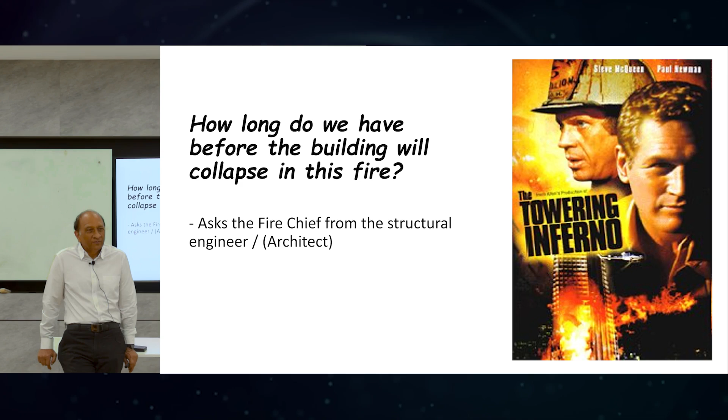I can assure you that even with all our simulation, all our software, all our modeling, we cannot answer that question, how long the building will survive before it fails. But people expect that kind of answer from us. Exactly the same thing - people expect engineers to be able to tell them about safety in their view, not in our view of the code, factor of safety and all that stuff.

So this is a reminder that even a long time ago, they expected engineers to answer that, which we still cannot answer. In fact, that prompted me to do some research trying to figure out how long a column will last in a fire.

We did some finite element modeling of heat transfer from the outside through the concrete to the rebar, then did fiber modeling and nonlinear analysis of the section over time and temperature, trying to see when the rebars will yield and when the concrete will crush, including temperature effects. And just for one column section it was very hard, let alone the whole building. So we are still very far from really simulating the damage in that way.

So now, we have seen this before - you've seen many of these slides showing that a lot of progress has been made, but still the progress is not as people expect from other products. For example, you buy something, it doesn't work, you return it, you get your money back. The structure doesn't work, you cannot get your money back. We don't have that kind of warranty yet because we just don't do enough yet - it's not a product yet, right? So we are still very far from what people expect from other things.

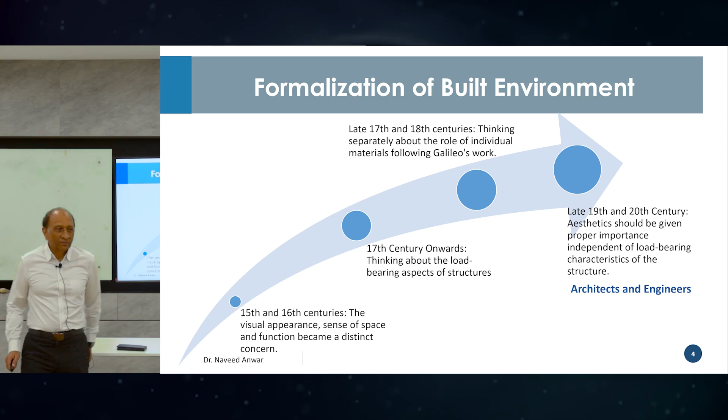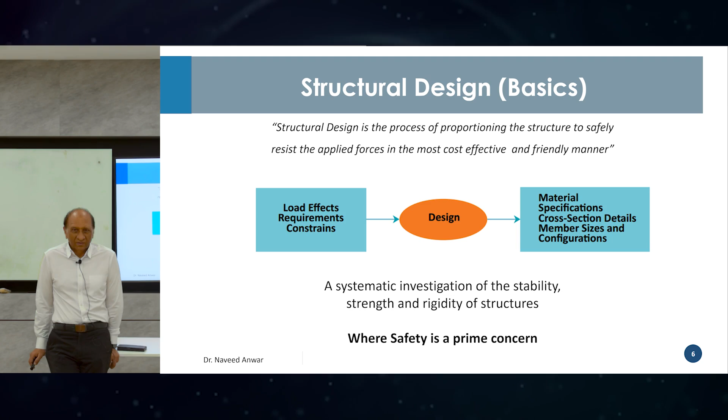Let's just move forward. We are mostly concerned about that - safety is our prime concern. That's where we draw our line, that our job is that, and once we do that, we think the rest is somebody else's problem. But that is not how the public sees it, and that's not how society's damage is happening. Cities come to a halt not because structures fall down, but because of damage or a perception of damage, a perception of unsafety. So that's what we are talking about today.

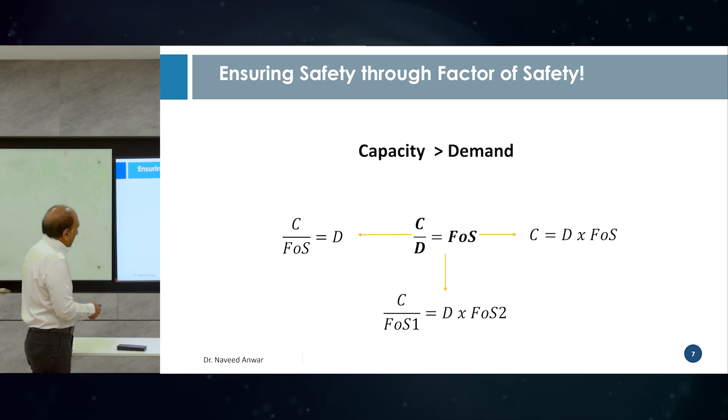So factor of safety, as I mentioned, we have all these formulas to deal with that. But once again, it's all about safety and factor of safety, and factor of safety is such an unreliable way to look at things, because the way it is calculated, the way it is assigned, it doesn't give us any real knowledge. It hides everything in that factor. All the things that we should know but don't, we call it factor of safety - which is the factor of ignorance, you may call it.

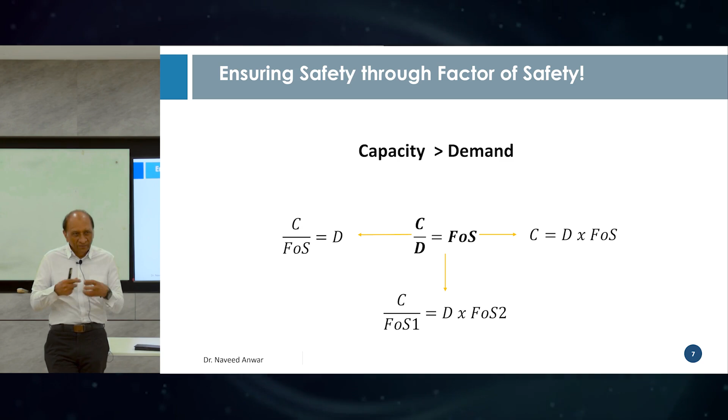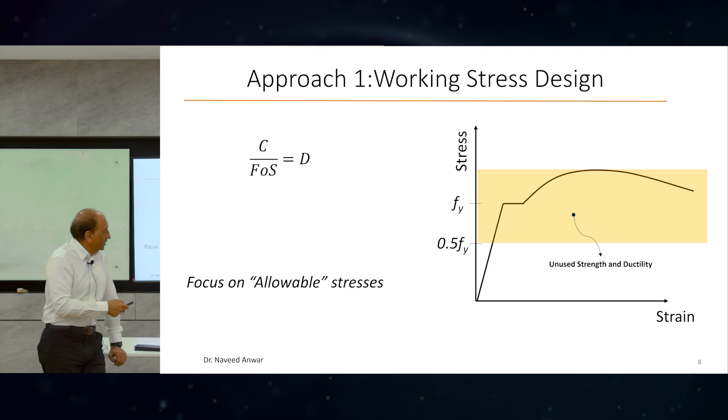So if we want to remove all of that, we really need to understand things in depth. That is the area that we don't know - we put it in the factor of safety, from 0.5 FY to yielding and beyond. We just don't know what is happening to the structure and what is happening to the things attached to the structure - we just draw the factor of safety. This is the working stress method where we started, and then we go a little bit up to FY, but we still don't know.

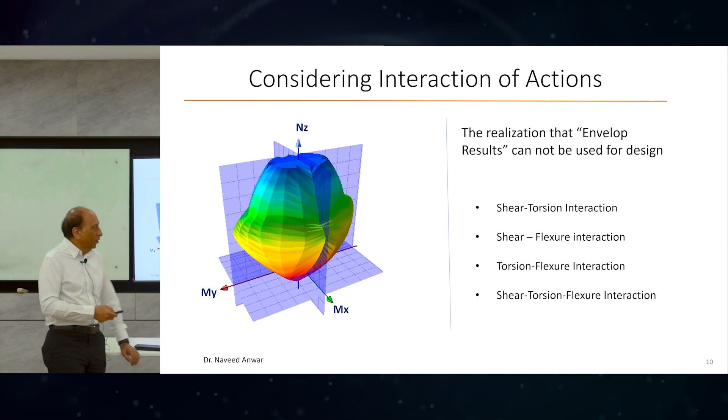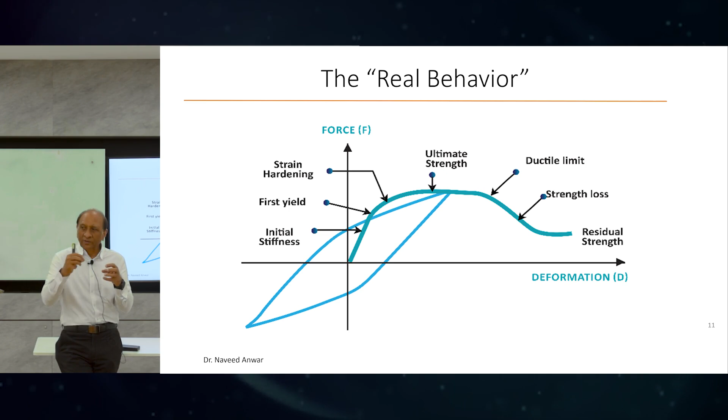So residual strength for structural elements and non-structural elements is different. The problem is that for non-structural elements, the residual strength is very little because it's brittle. And so as soon as they reach that point, they're just gone and their connections are gone. The problem is that we don't design them to absorb the movements, acceleration, and velocity. There are three components: drift, displacement or velocity, and acceleration. And things get damaged differently from these three things. Some things get damaged by drift, some by velocity, some by acceleration. So we have to separate the non-structural component damage into these three categories.

So seismic design approaches, we have already talked a lot about, I'm just summarizing. So for the earthquake, we need to talk about the drift, we need to talk about the acceleration and ductility, levels of damage, life safety, collapse prevention, energy, damping, and many things. And at this point, what is less important is stress, strain, strength, stiffness, and factor of safety.

Those become almost irrelevant in this discussion because, as I mentioned in my other class also, earthquake is bringing the level down, not up. Wind's service level is here, we multiply it to bring it to the design level. Earthquake is already very far above, we are dividing it to bring it down to the design level. And that division has so many issues. That's why we cannot assess these things accurately, and we need to expect that the real force may be much higher than the design. That's why all this damage can actually happen.

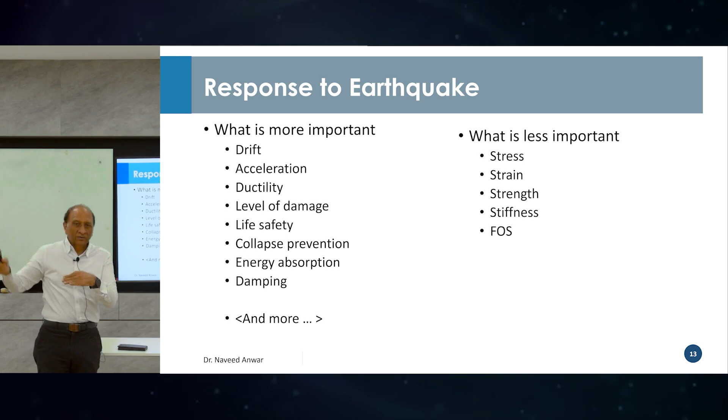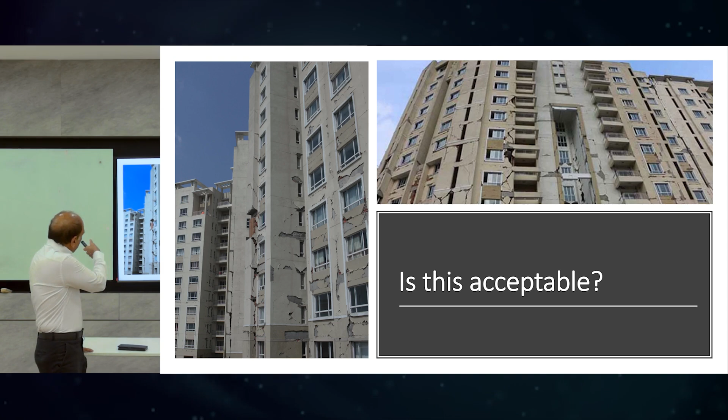So this is the image from Nepal. I went there, and this presentation was made after that earthquake. This is a very interesting case study because there were three buildings there, three towers of different height. And when you go to the site, you can see there's a lot of damage very clearly. This building was designed very well by good consultants in India, following the codes, but look what happened. It's non-structural damage, the structure is still safe, but do you think anybody will live there? You will not live there, right?

So even if we do PBD, we will still get this. That's the sad part, that even if we had done performance-based design for that building, we would have still gotten many of those cracks. So even if we do nonlinear analysis, because we are expecting the walls to break, you model the walls in the nonlinear models. In fact, they did not model the walls, but now we recommend everyone to model the walls using strut models. But the strut is designed to break, which means we are expecting the walls will break. So it's a perfect structural model with the damage, but it is completely unacceptable to anybody. People spend a lot of money, earn from abroad, bring it back, buy something, and then the building is gone. So this is a major problem: this kind of damage, which is acceptable by us as a design process and acceptable by the codes, and even acceptable by the PBD, is not acceptable by the public.

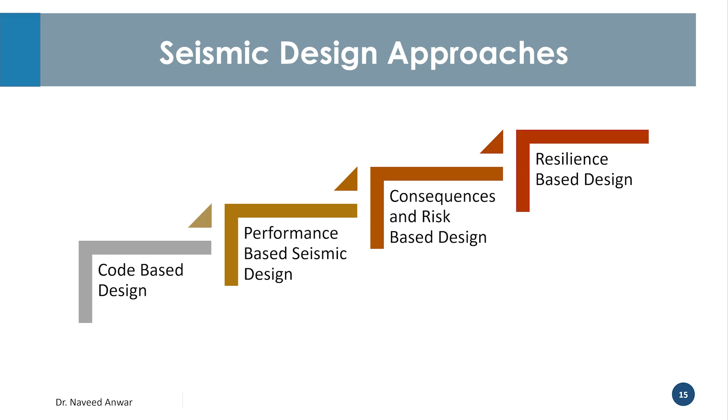So this is what we are talking about today. And that is what we talked about, all the steps, all the way to resilience. So now we are talking about consequence and resilience beyond PBD. Code-based design we have talked about already, I can skip this because it's a repetition.

It's mostly code-based design, basically we want structural safety, but that's never really checked. Of course serviceability is checked, but that's for a much smaller earthquake. As soon as it goes beyond that, we expect the damage to come, but people do not expect the damage to come. That is the key.

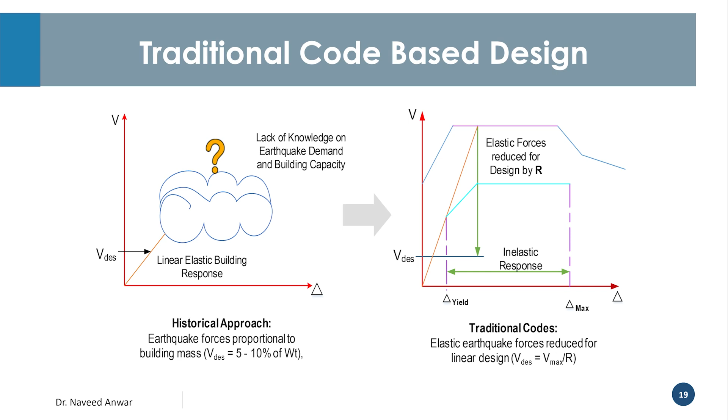So this is the historical approach, that we put a cloud in this area above that. After linear, we have kind of an unknown zone. We just don't know what is going to happen, and we keep it that way until PBD came and we start to explore a little bit more. But still, a lot of things are in the cloud. We still didn't check a lot of things that I mentioned to you.

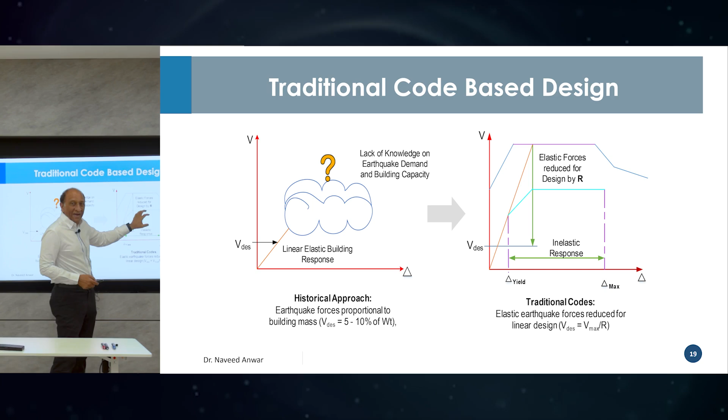And then because we have the elastic response reduced by R, which is wrong, and so many other things, codes try to remove that cloud by putting this one in, but then add more cloud, because R itself is not reliable. So now you can see that there are so many codes.

And this brings us to another question, which is a very simple question: which code is right? Just the fact that three codes differ proves that none of them can be right. Because the structure is the same, the earthquake is the same. Why do two codes tell us one is saying it's safe, one is saying it's not safe, one is passing, one is not passing? This means it's quite arbitrary. All the codes are rather arbitrary.

And that's why we did one thesis a few years ago. We said, okay, design the same building with nonlinear analysis, first design them to 3 different codes, and then do nonlinear evaluation to see which code predicted the best, was closest to the PBD, or gave the best performance. So we checked ACI, we checked BS, and we checked Eurocodes.

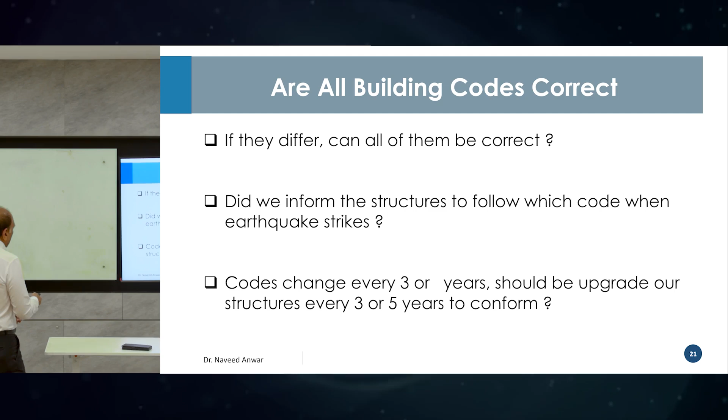So that's the other issue here: if they differ, can all of them be correct? Logic says no. If there's only one truth, and they're all giving different results, then chances are that none of them are right.

The other thing is, did we inform the structure to follow a certain code? You design based on a code, did you say, 'I'm designing you to ACI, please follow the ACI when the earthquake comes'? Of course not. It's going to perform the way it likes to perform. It has to perform. That's why PBD is not code-based, because we want to see the real earthquake, the real structure, and let them decide.

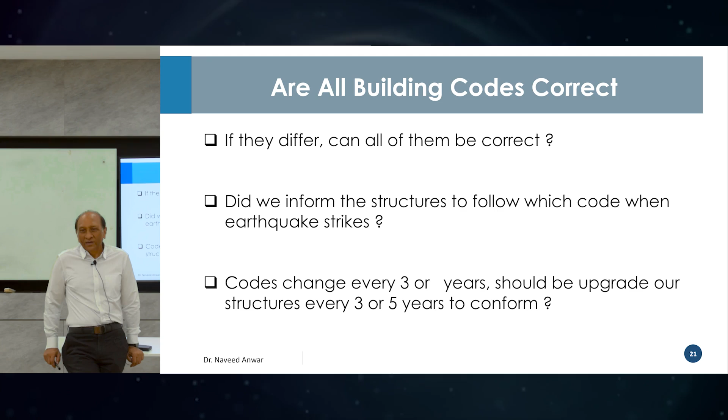And another thing, the code changes every 3-5 years. Formulas change, limits change. Should we go back and fix every building? We cannot, right? So a building which is passing today, in the next version the same building is not passing. What is that? But of course, that's how progress is made. The point being that we should not take these things extremely seriously, and should recognize that they have limits.

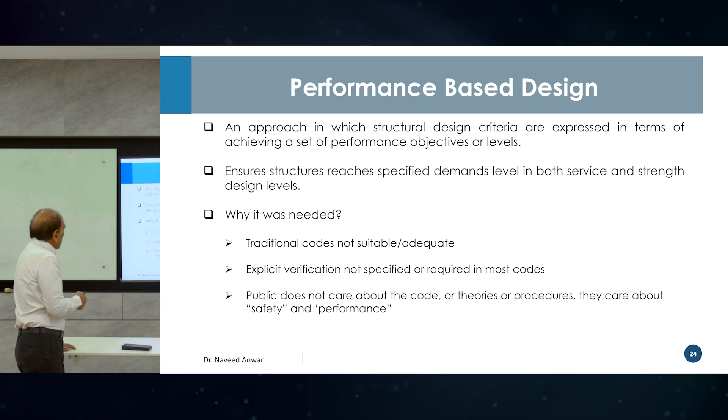Okay, so this is all we've talked about. Let me just move on to the topic today, because PBD we've covered quite a bit.

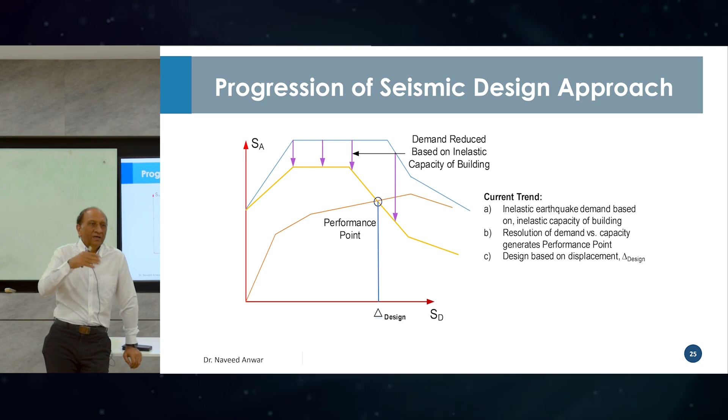Low earthquake, high earthquake, very high earthquake, some earthquake beyond that. So we can find out multiple performance points for different levels of earthquake, and then see how the structure's response will be.

That brings us to this one: operational, immediate occupancy, life safety, collapse. So we can say, okay, for this earthquake we want the structure to be like that, for that earthquake we want it to be like that, for this building, for this earthquake here. So we can decide two things: same building at multiple different earthquakes, and different buildings for the same earthquake.

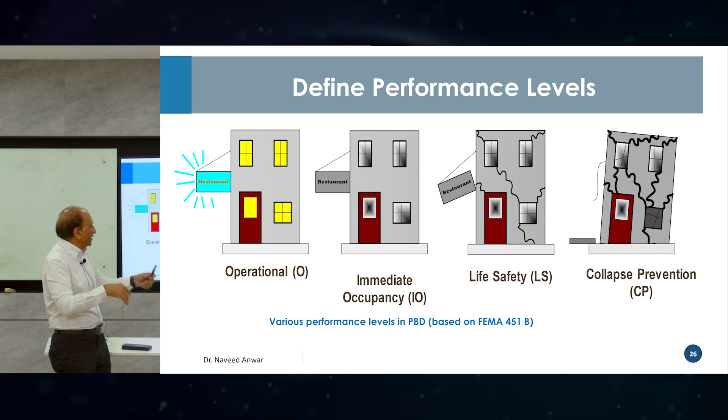For example, a hospital - we will say, okay, even though the earthquake is very strong, I want the hospital to be operational. This is storage, there's nothing important there, okay fine, we just prevent collapse. So for the same earthquake, different buildings can have different performance expectations, and the same building can have different performance expectations for different earthquakes. This gives us complete freedom to evaluate everything.

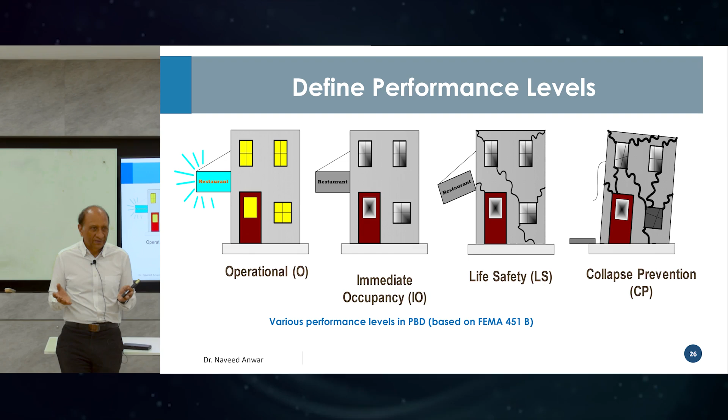That's what PBD is, what we have been talking about. And we can put it on that curve, as you can see from here, so we can link everything together.

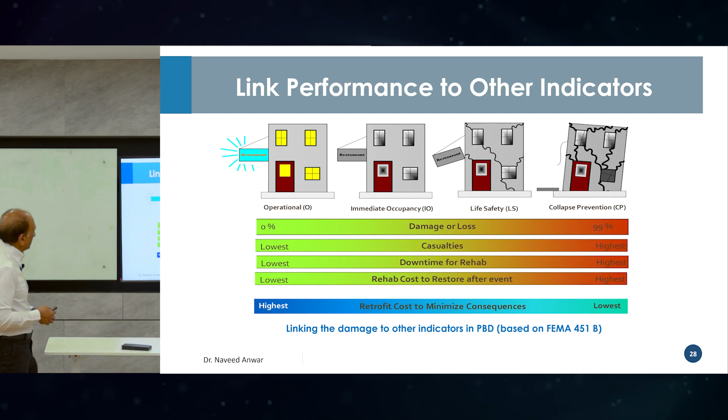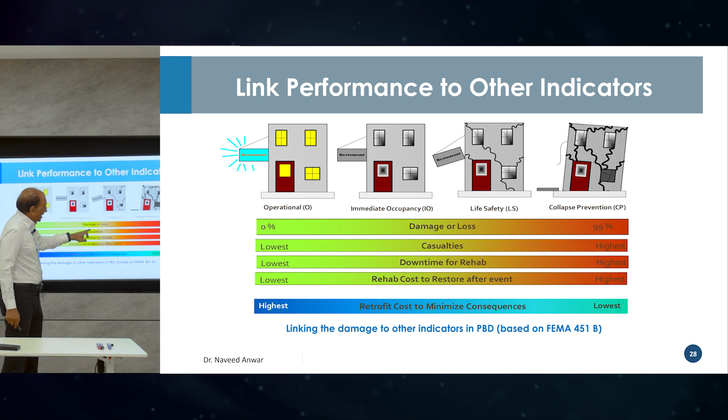Next, this is the main slide. Because once we have that, we can connect not only damage, but also casualties, human loss of life, serious danger, and downtime for rehabilitation - very, very important, how long you have to shut down the building to repair it. For a hotel or restaurant, they lose business for 1 day, 1 month - that loss is huge. For a critical operation, it's much, much bigger than the cost of the building, and the cost to get it back.

And then retrofit cost to minimize consequences. So everything we can put now on one sheet.

Once we have done the performance evaluation, we go beyond - we don't stop at just performance. We go to these 5, 6 different new lines also and start to evaluate them, and then we get the total resilience of the structure. That means the client or authorities can decide that, okay, we don't want it to remain shut down for more than 1 month.

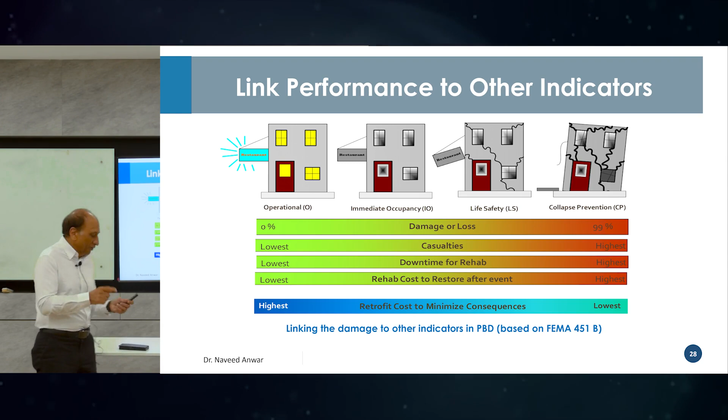But do we have the tools to do that? Do we have that? And luckily we have. We can actually go to the level and say, okay, you want this to be repaired within 1 month? We can do that. But the problem is not about that - I will tell you what the real problem comes later.

So performance-based design - we talked about that we need to involve all these people now to make sure that everybody works together. So we need to involve the architect, first of all, because non-structural damage will be linked to them, and then structural engineers, the performance-based design people, the site-specific consultants, and the PBD reviewers. Everyone has to agree that this is what we are going to do.

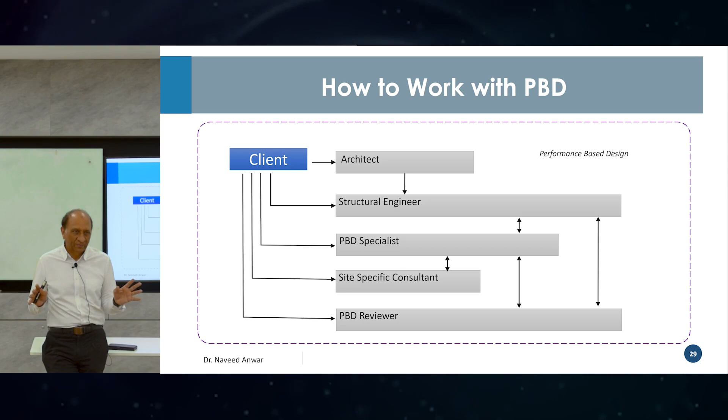Because this is not the code. So client, architect, the designer, structural designer, the PBD reviewer, and the PBD consultant - everyone has to agree this is the performance of the building that we want. This is non-structural, structural damage, everything that we want, it should be like that. So that has to be agreed, because everything next will depend on what is agreed.

Okay, first is number 1: everyone has to agree that we are going to go beyond the codes. Now you can ask, do the codes allow that? And the answer is yes. Codes actually say that if you can prove that what you're saying is better than code, you can go ahead, and if somebody can certify that. So by definition, procedures like this are allowed by the code, but you have to qualify to get that.

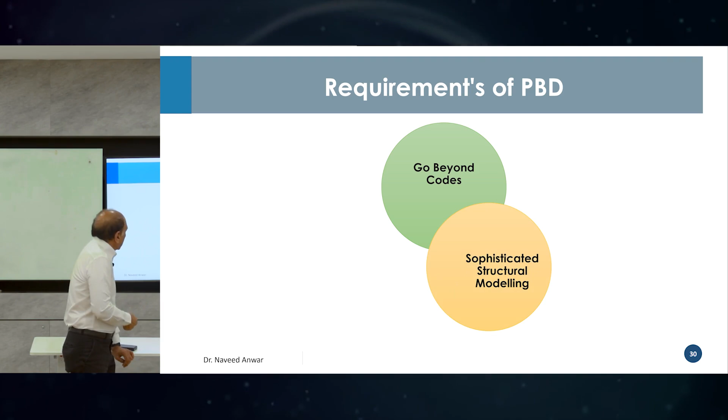So that's number 1. Then we need to have sophisticated structural modeling - that's what we are talking about, a lot more than what we did for the class project. Some groups are trying to do that, fine, but we need to learn, and we have a few webinars. You have seen Dr. Pramin present a lot of the details for the nonlinear modeling. So we need to have that ability.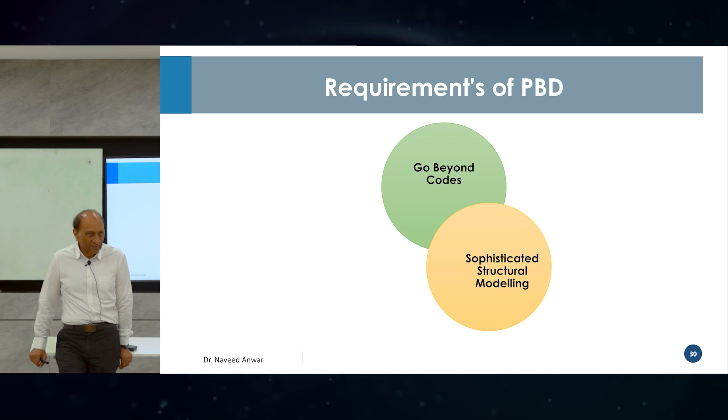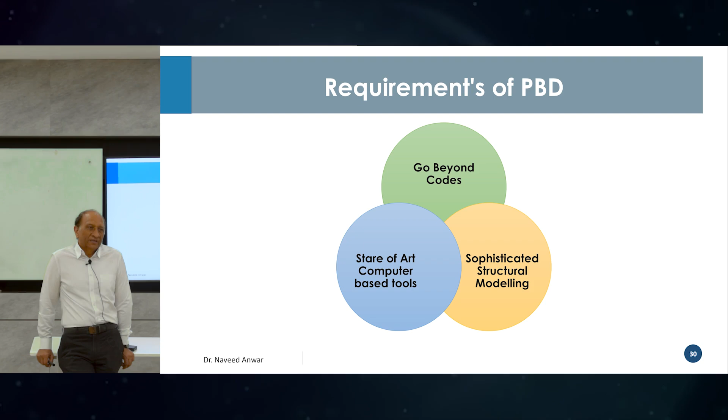So you need to have software, you need to have the ability to model that, and you have to have people who agree to do this: linear, nonlinear, result, and interpretation.

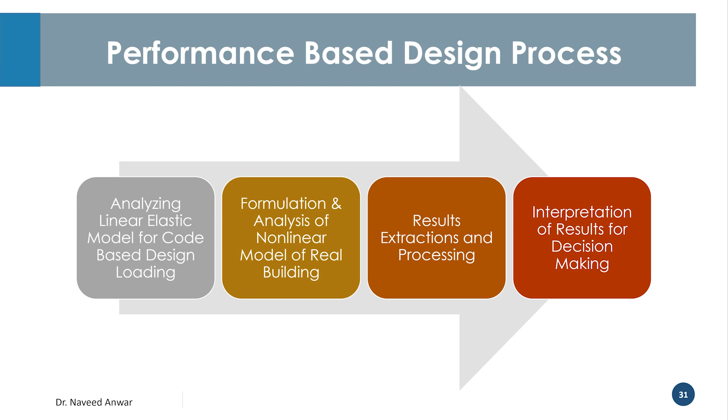That is still possible, it's a step up. The biggest challenge is that you need to incorporate the actual reinforcement from the building drawings. So it's no longer that you just put in the section, you have to put all the reinforcement in the model, and that takes a lot of effort to get that information. So design has to be complete, detailing has to be complete, then you bring it back to the model. It's just a lot of work, not so difficult.

The next one becomes more difficult: extraction of the results from the nonlinear analysis, because this can produce up to 1 terabyte, 2 terabytes of results - terabytes, not gigabytes, I'm talking about terabytes of data. So if you have that much data, just opening it, getting the results back, compiling it, processing it, it's a huge task. And once again, even if you can do that, then finally understanding it - that's where most of the difficulty lies, not in the first two parts.

That's what takes time, years of practice, to do the third and fourth parts. Sometimes now it's getting better, but sometimes you have to wait days and days just to get the results - extracting the results, not running the analysis. That can take so much time because you have 11 ground motions.

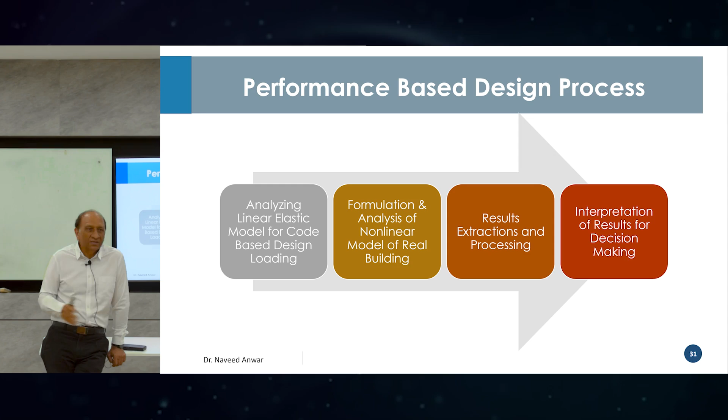Every time step in one ground motion runs for, let's say, 50 seconds, 1,000 time steps. So you have 1,000 results from 11 ground motions - 11,000 results for every column, every beam, and then all the load combinations. So the results are just unbelievably huge. And then getting them, understanding them, averaging them, plotting them - it takes a lot of time, effort, and understanding.

So from that we move on - I've talked about the questions from PBD. Once we have done the PBD, as I told you, you can get a good idea of how the building will respond. But it doesn't tell you what is the risk and what are the consequences - we are just doing a process, we say okay, I'm here. But the question is, what is the risk of things not going as we predicted?

Because this is not absolute certainty. It's still a gray area in many ways, because you did a model, the actual material - so many things that are still not absolutely certain. So there is still an element of risk there, uncertainty there.

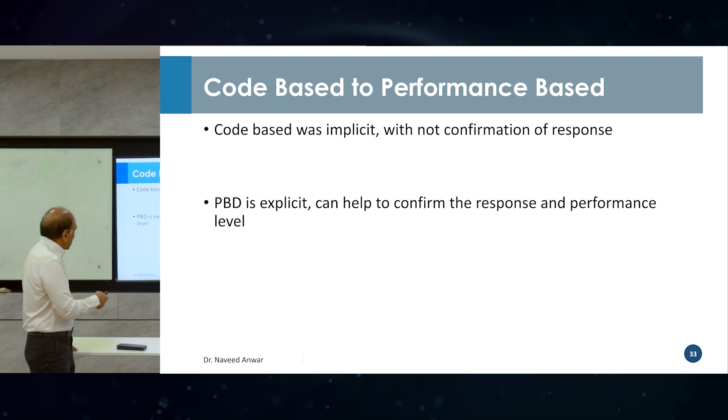So what if the performance level is not achieved in reality? That is the question - okay, we have estimated everything, but what if that is not actually achieved in the real building, because of modeling inaccuracies, because we could not model the foundation properly, maybe the material strength is more or less, or some member, some extra mass was put there, some walls were added - because we can't know the structure fully until it is there.

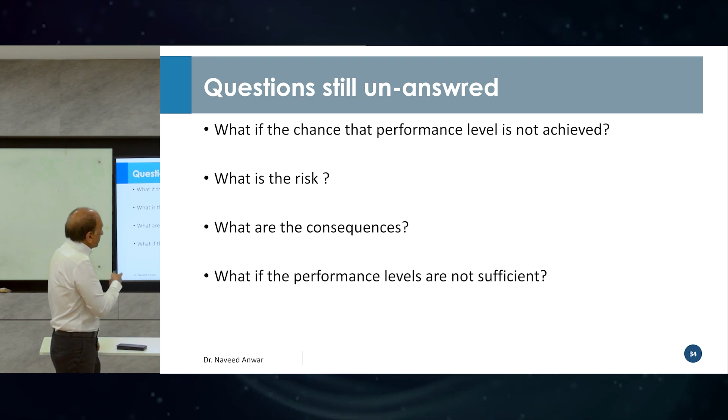So there's still a risk that this performance objective will not be met. And the risk you have seen in that building I showed you earlier, the cracking - that's the risk people have to take. Then what are the consequences of that cracking? It will affect people's lives, it will hurt somebody, it will cause people to lose their life savings in their apartments or whatever.

So the consequence of that risk is very different from PBD. PBD doesn't go into that direction, doesn't care what happens after that. Okay, and then what if the performance levels are not sufficient?

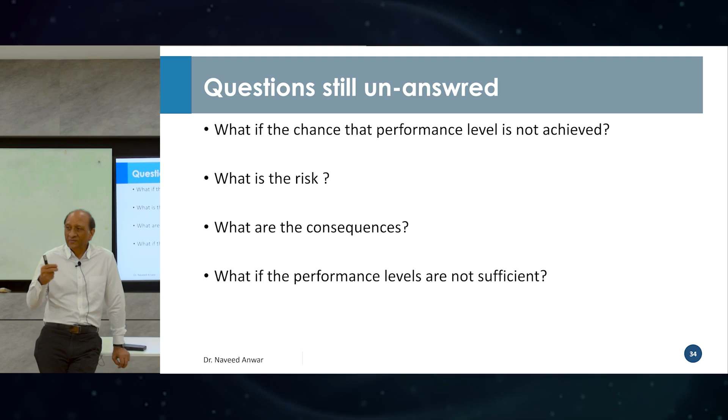Like I said, the baby hospital needs something more because they installed special equipment that cannot sustain even that much vibration, like MRI machines. Or now all these data centers, extremely sensitive, right? So we don't even know what kind of performance levels we need for them.

So these are the few questions. And like I said earlier, is this acceptable? Obviously you will say not, but the codes say yes, this is what you were designed for. Try explaining that to the tenants, that I designed your building for the code and you have to accept it. And that is our challenge.

We are very lucky in Bangkok that the damage is there, but people are still understanding. And this overall, I went to the city, I talked to many people. There was a big event we had, and people start to know, okay, there are people called structural engineers, and there are people who did some good jobs so the whole city survived because everybody felt the shaking.

99.9999% of buildings survived very well. So which means people believe that, okay, there's some engineering behind it which saved them, because they saw one building collapsing. So it is a reminder that things can be that bad, but it wasn't that bad in your building. So you should be kind of thanking the engineers. So we are in a good shape right now, at the moment, okay, in the public opinion. So we should be glad.

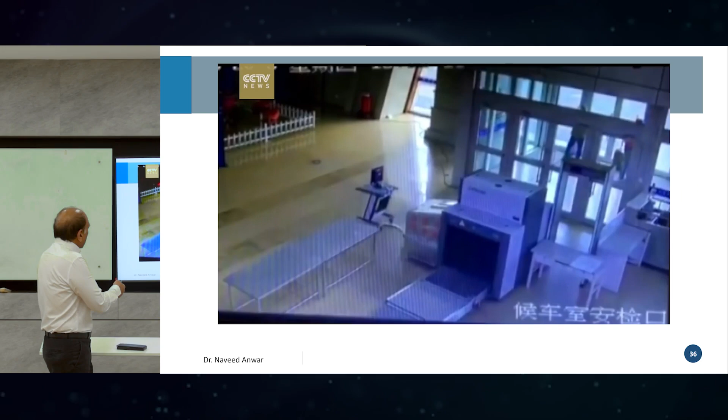But this is not good, as you can see from here. In the public's eye, this is not good. And that is where, so even if we do the PBD and everything, we still get that. So now we have actually experienced it, so it makes it more real. You people haven't - people in tall buildings in Bangkok, you should ask them what happened to them.

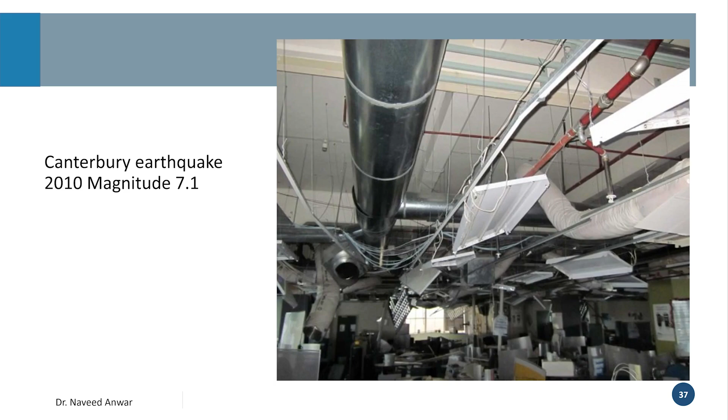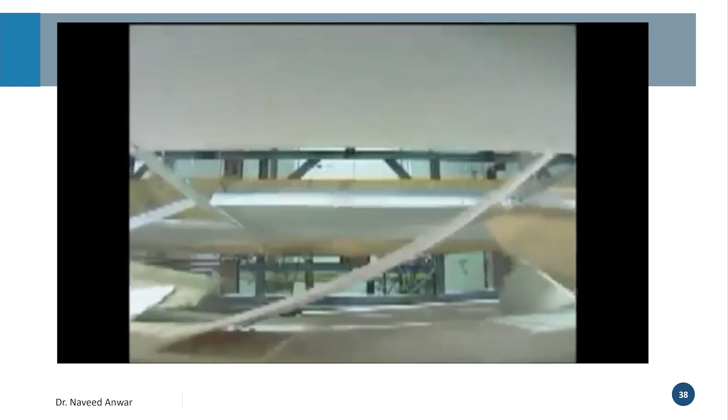So this happens in so many buildings. The ceilings fall down, the partitions crack, which means the public and society still doesn't really accept our things yet, right?

It's just like the development of automobiles. If you look at the movies from early on, even in the US, nobody's wearing seat belts. There's no top, people fly, because safety wasn't - it was acceptable to get hurt. People expected to get hurt in a car accident. Now, people do not expect to get hurt. They expect the airbags everywhere, they want the sensors, and they expect, and that is happening.

Even in major accidents, people survive without any injury, most of the time. I don't know if you know that story about the Tesla car and somebody tried to drive it off a cliff. Do you know about that? Okay, so in the US, there was one family, and the person was driving. He decided to commit suicide by driving the car off the cliff with his family, for whatever reasons.

So when they tried to turn, the car wouldn't let him turn because it sensed something was wrong. Anyway, he forced the car, but because the car already knew it's going to happen, it engaged all of the safety features - the airbags, the seat belts, and everything. So even though the car went down and hit, people were saved.

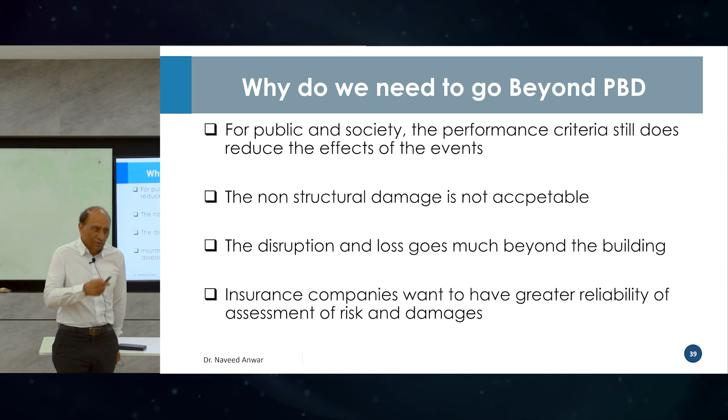But my point is the insurance companies were not happy. And this earthquake, insurance companies are obviously not happy. So they really want this research to be done so they can protect their value and insure the buildings properly. The people behind the non-structural damage assessment funding are insurance companies. It is in their interest to do this, right? So if you want funding at this point, go talk to insurance companies for your research.

So, consequence-based: it's not enough to say that cracking and non-structural damage is acceptable as long as the structure does not collapse. This is our statement right now as engineers. It is not acceptable by the public, by the insurance companies, by other people anymore. Just to say my structure is safe, I don't care about the non-structural damage - it's not going to be acceptable, even more so.

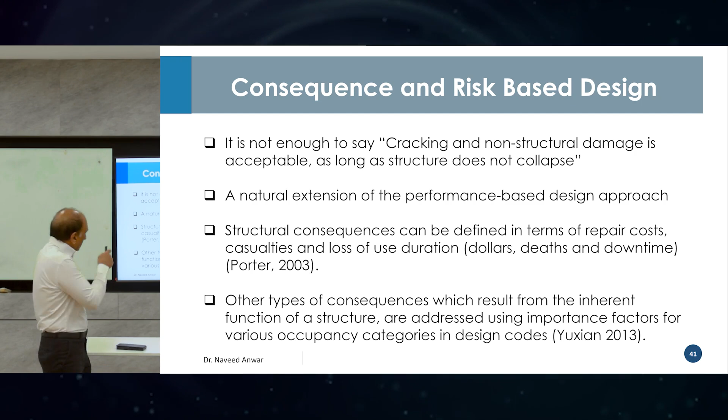Then a natural extension of performance-based design is that we have to do what they call DDD: dollars, death, and downtime, triple D. You have to care about the money, you have to care about the casualty, and you have to care about how long the building will not be operational. So those 3 Ds are very important in dollar terms. You have to be able to assess that as part of your design.

What is the expectation of the damage? What is the expectation of the deaths? What is the expectation of the downtime for repair? That should be part of your design evaluation. Okay, that's what we are talking about today.

So all of this, lucky for us, can be determined from the analysis. We just have to go one more step beyond that. It's not that it cannot be done - it can be done. Frameworks are available, tools are available to do that.

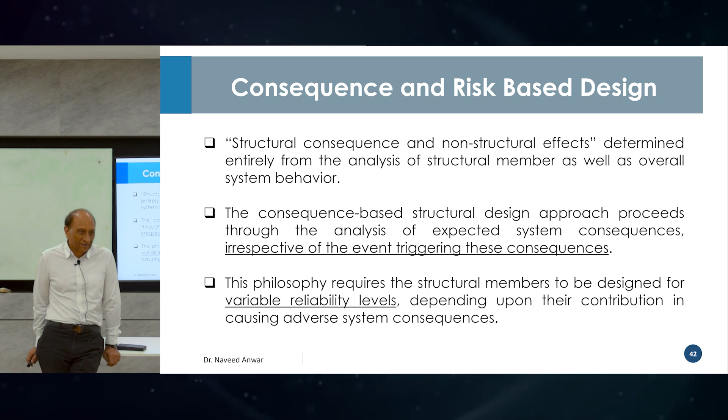So the thing is that for risk-based design, now we need probability, risk, safety of critical elements, design accidental loads, and then finally structural design. That means we have to think a little bit differently.

First of all, probability has to come in. What is the probability? Already seismic design is probability. MCE is 2%, design basis is 10%. MCE 2% means there's a 2% probability that an earthquake will hit during the life of the structure. Design basis earthquake is 10% probability that it will hit that site in the life of the structure. Service level earthquake is 50% probability - so the service level earthquake should hit 1 or 2 times.

And this earthquake that hit was between service and DB, wasn't MCE. It was 1/3 of DB roughly. So we didn't even reach the design level, which was below that still.

So the point is that we have to do more probability of the consequences and then risk - quantify the risk. What happens? What is the value of the risk that I'm taking? Is it an acceptable risk or not? Calculated risk - so calculate the risk.

Then safety of critical elements. Go back and say, okay, even though the PBD is okay, this element is too critical, I will further add more safety and reduce the risk further by focusing on the shear wall. For example, that building - once again, if a risk assessment had been done, the core walls should not have gone down like that. It's impossible in any scenario for the core walls not to keep the building stable.

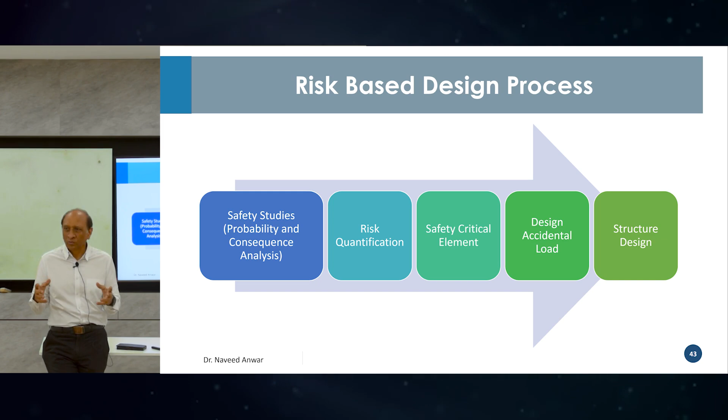Everything else can go, not core walls. So somehow they didn't do enough. Stories are flying all over. They just reduced the thickness, whatever - I don't want to go into that. The point is that critical elements must be further enhanced to reduce that kind of risk.

Then design for accidental loads - also add some accidental loads that are not part of the typical design, to further eliminate the risk, reduce the risk, and then go for the structural design. So that's the procedure: we add 2 more levels before we do the design.

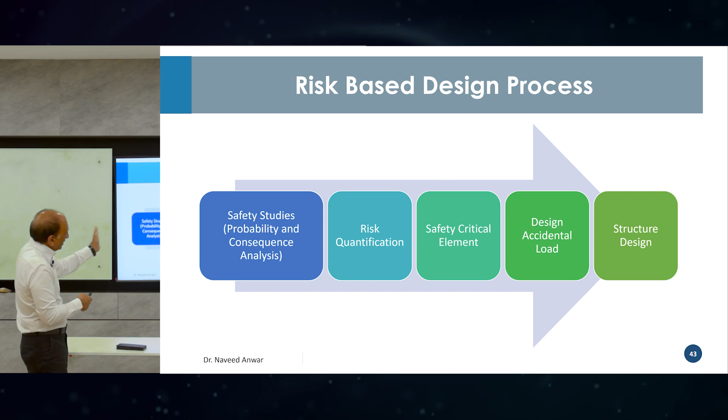Then we have to do this kind of site-specific consequence of failure and likelihood of failure. These three things are very important now, beyond PBD, beyond code. First, the site seismic hazard study, which is part of PBD, meaning you cannot take the map from the code - it's meaningless. You have to do the actual assessment of the hazard at the site, studying all the faults as far as possible.

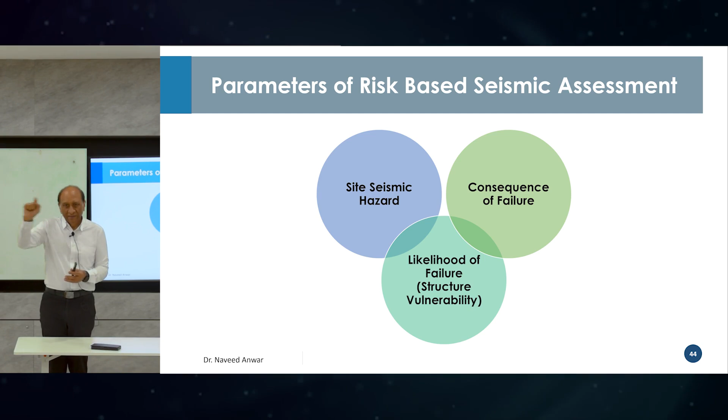So when we do the seismic hazard assessment of a site in Bangkok, we take all the faults in Myanmar, China, Chiang Mai, Indonesia into account, not just Thailand, because earthquakes don't know boundaries. We have to go as far as we can and assess their impact on the site. Then, consequence of failure - what can happen if failure happens? What are the consequences, are they acceptable or not? Some are acceptable, some are not. You have to list these consequences and go back to the risk. Then likelihood of failure, vulnerability - all these things need to be combined.

So you categorize the beams, columns, walls, whatever, into this kind of table, and then say, okay, this one I don't need to worry about, let me worry about this. Something which can happen with high probability but the consequence is very high - I must prevent that. So you have to study both. Even if it's high probability but the consequence is very little, no need to worry. That's what we need to estimate - very high probability and very high consequence is critical, we must not let it happen.

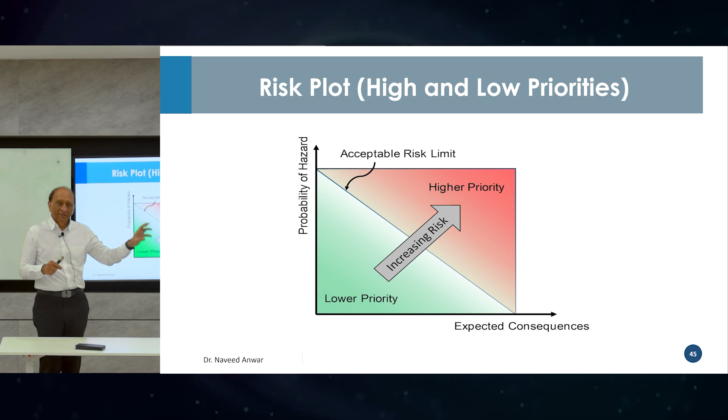Even for low probability, but the consequence is high, we should still worry about that. So that's the idea of this whole diagram - to understand every consequence, plot them against their consequence, every failure against the probability of happening and the hazard.

And that brings us to consequence and risk-based design, the next level. Few people do this at the moment, but people are doing it. We had one thesis done on that, and it was interesting - we finished the PBD and said okay, let's do the risk. But for risk you have to do more, not just one time with varying strengths, because right now we're just saying PBD is this structure, this hazard. But for risk, you need to vary the concrete strengths, vary the probability of not meeting the expectation, some element not there. So you have to vary many things, study it, and try to fit that. You cannot just base it on one analysis - that's why it's so hard, because you need to work on the probability by varying the possibility of failure.

That brings us to a fragility curve, which I will show you in a minute. So we look at the overall impact much beyond the building. Now we have to go beyond risk-based design - risk-based design is only for the building. But let's say if it's a hospital or a fire station, if that hospital or fire station is damaged, the effect will be on the whole community. So it now goes beyond the building, no longer just up to the building. The resilience of the city or community depends on that building, so the risk is not limited here - we need to go out and look at the impact.

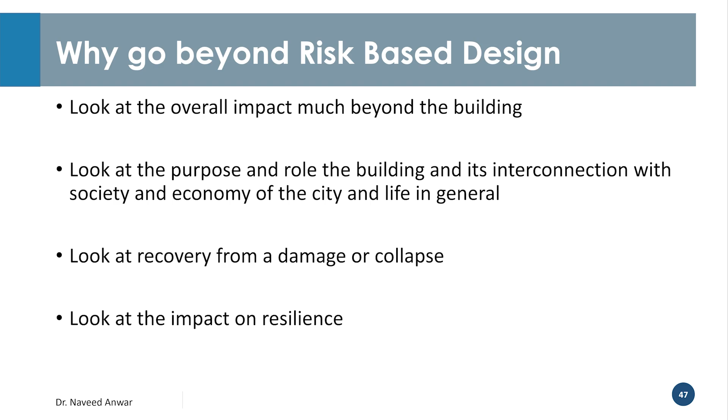I remember when we started PBD, like early 20 years or so, we got some projects in Bangladesh to evaluate fire stations. That was the first project, because they were worried that fire stations should not get damaged. We started doing nonlinear evaluation of the fire stations at that time, put some BRBs there. So immediately the fire station comes to mind - they have to remain operational.

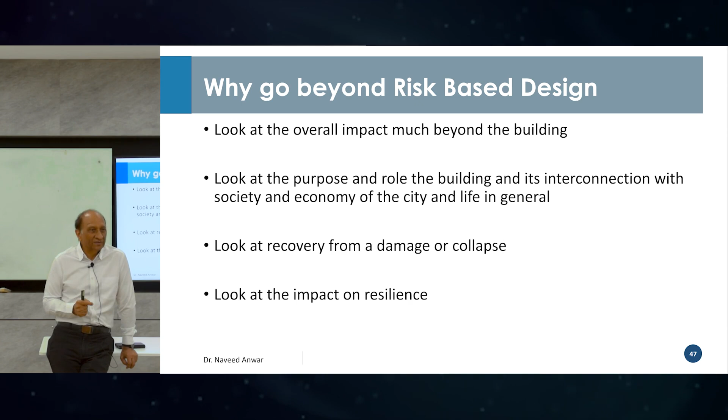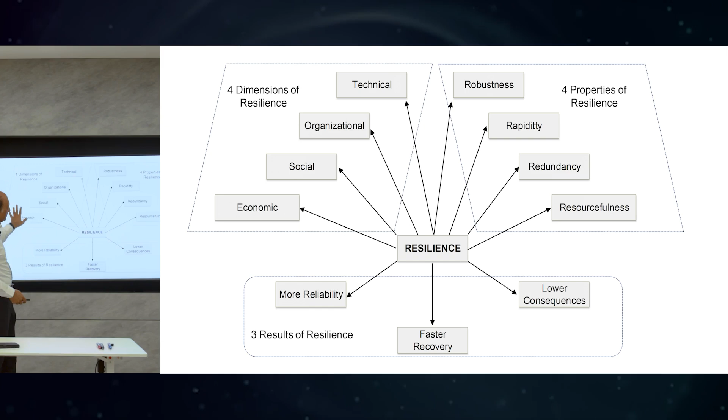So resilience-based infrastructure. Resilience is much more than engineering. It's very broad - it's the reliability, fast recovery, lower consequences. That's one block. Then you have the economic, social, organizational, technical aspects. Then how fast, how redundant, how resourceful.

Resilience has a big picture. I cannot go into a lot of detail, but the point is you have to think about everything. Will they have the money to do it? Do they have the people to do it? This is what becomes a problem. Even though you estimate that your building will be repaired within a few months, in reality if there are 100 buildings damaged, you won't have the people, you don't have the material, you won't have the contractor, you won't have the designers.

So that's where the resilience comes in. And I have seen this firsthand in Nepal.

After the 2015 earthquake, we got a project from JICA and ADB. I was representing ADB, another team from JICA. We got $200 million to go there and fix up the schools after the earthquake. The money is with us, lying in the bank. For 1.5 years, we could not spend even $1 because the capacity isn't there to design. The capacity isn't there for contractors to bring the material. It was so sad that the money is there.

Consultants are there. We were there. I was there for a long time. And we just couldn't spend any money for more than 1.5 years before the first school was built. By that time, they had already moved on, and made some makeshift arrangement, set things up. Schools are going on, right? So that's the resilience of the community - they just continued on their own without waiting for other things to come. That's the overall resilience, big picture.

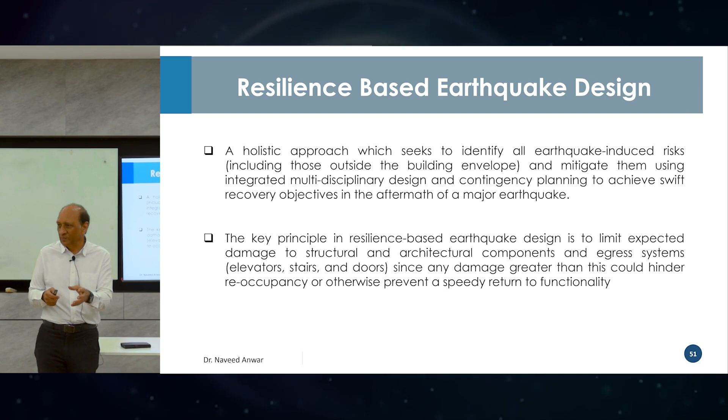So we have to take a holistic approach on the seismic risk, not just what we are doing now, because we are the center where everything will start. Of course water supply and communications are also part of that, but they're all attached to the building. The water supply actually broke in many buildings because of the drift.

So this is what they're doing. The Green Building Initiative was started a long time ago to make buildings environmentally green. Then another was started - resilience building. So you have the United States Green Building Council, and they say okay, we want a United States Resiliency Council to match with that. So these now go together - sustainability and resilience combined to complete the big picture. They followed each other and connect to each other. This Resiliency Council, Resilient Buildings, is an initiative to make buildings resilient the same way they make buildings green.

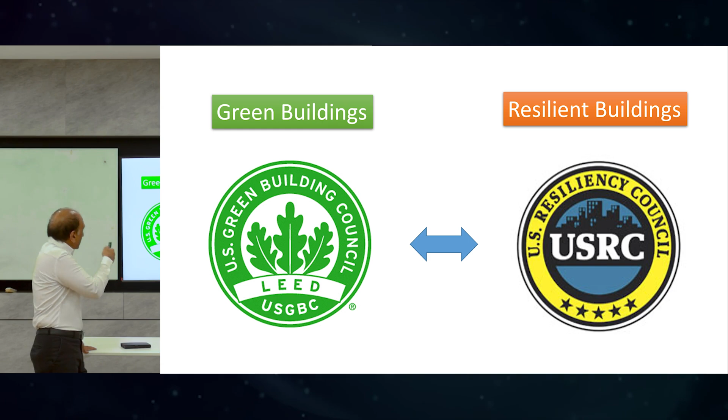We should have it like green buildings have a rating - gold rating, silver rating, platinum. We don't have a resilience rating yet. And there's a big danger in that, because if the building is not highly resilient, people will not buy it, people will not live in it. Unlike the green building, which is not the same - resilience is not being applied because nobody wants to put a bad sticker on the building. They won't be able to sell it, right?

Anything less than gold and platinum, people say, why should I live here if it doesn't have a good rating? So this REDi initiative started about 10, 15 years ago, by Arup, the world's largest consulting firm, and then other people joined in. I used to attend their meetings at that time.

So they have these ratings: platinum, gold, and silver. This is their framework. If it is a platinum rated building, you get immediate reoccupancy after an earthquake, you go back in. The building has no damage, nothing.

Direct financial costs would be less than 2.5% of the building costs, and physical injury or failure of the building is completely unlikely, nothing. That is the gold standard, platinum standard, that you should have for the building.

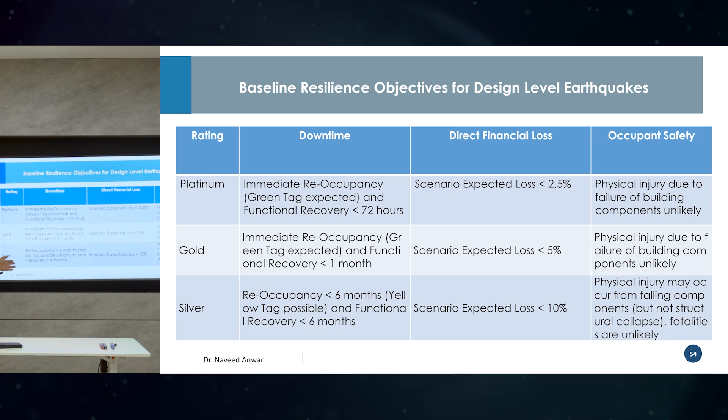Next is gold: immediate recovery and all of that, with a scenario expected loss of 5% and some injury, a little bit. Silver means 6 months to come back. If everything is available, there's a 10% loss, some people got hurt, and things collapsed.

So who will live in a silver building? Even that is not achievable in reality. Code-based design doesn't even come close to them. So that's the problem.

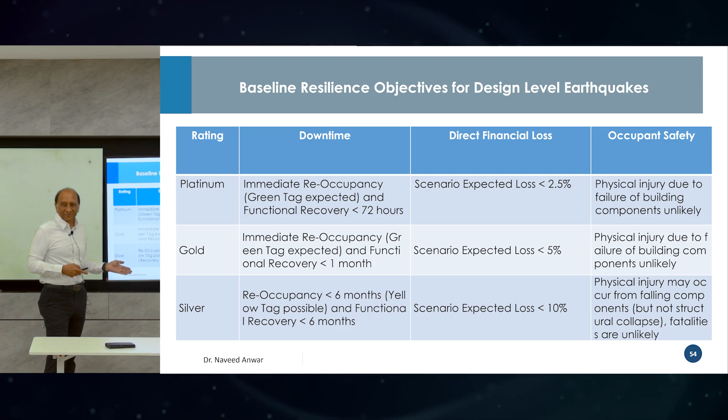So if the building is designed to code, like the one I showed you in Nepal, you expect it to get damaged and not be fully recoverable even after 2 years, with a lot of cost. That's the code level. And if you show this to the public, they will say, why are you even designing our buildings if you expect this to already occur?

But then you say, okay, if you want it to be platinum, you have to spend a lot of money, and once again, they will not have the money to do this. So it's a balance between initial cost versus the risk. If somebody has the money, like a platinum green building, it also costs a lot in the beginning, but they save over time. Similarly, a platinum resilient building costs a lot in the beginning, but you save in case something happens. So that's the trade-off between initial and later costs.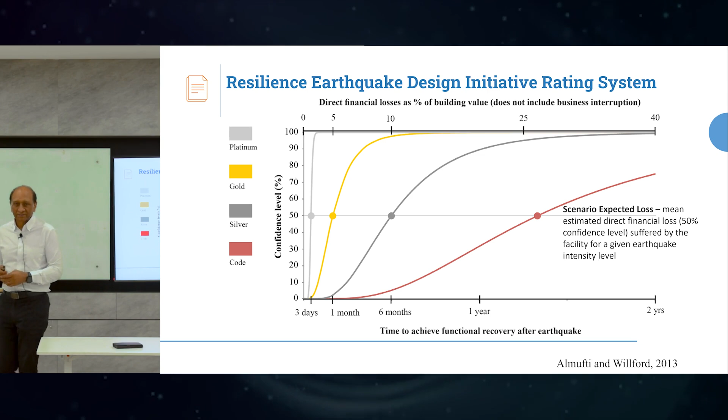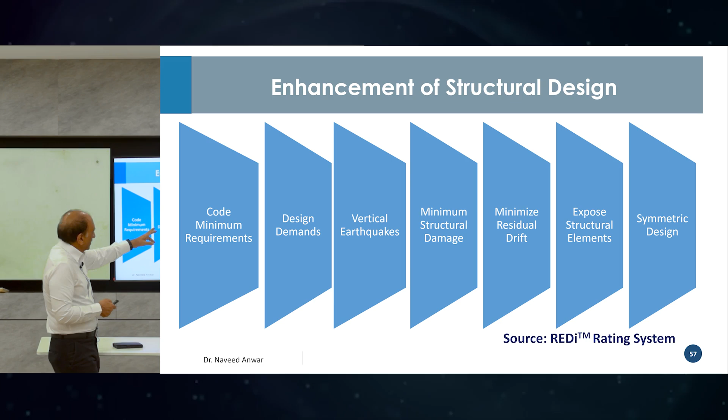And then we have all these prescriptive requirements and REDi guidelines, backup systems for everything. So for code design demands, we also have to consider vertical earthquake, minimum structural damage, minimum residual drift, expose the structural elements to inspection, and do a symmetric design. There are many things that they want.

I don't want to go into detail. Let me show you this thesis I mentioned, done by Catherine Diaz: enhancing seismic resilience of non-structural measures for tall buildings in Manila, Philippines. So this is what she did.

She took a building in the Philippines, did the design, code-based design, then did the PBD, fixed everything, then evaluated the resilience, then went back and improved the resilience. So she completed the whole cycle, and she did a good job on that.

So this is some of what she did, she collected the data. You need data now, you need to know how many people are going to live in each room, what partition wall is used, what the ceiling is, what the door is, what equipment is there. You need all that data to come to you first.

Then structural analysis, whatever software is used, then define components, loss assessment, then determine the level of resiliency, enhance the component, determine cost for enhancement, and go back to do it again. So it is possible to do it, but you need data.

So that was our first objective, our second objective, and our third objective: first just do this loss assessment, then enhance, then reevaluate. Three steps. This also gives you some idea about how theses are organized in this way.

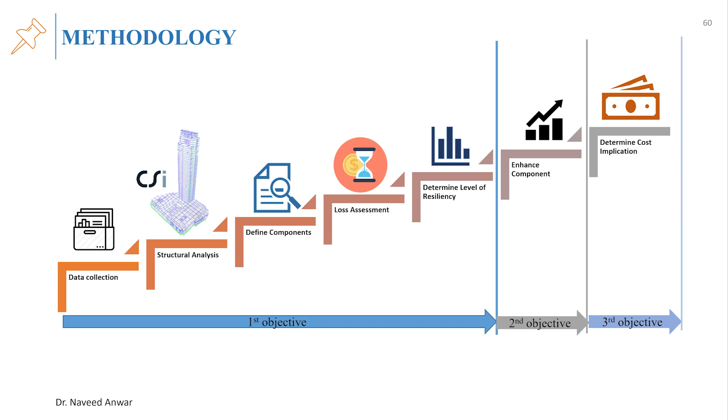Somebody can continue this, because at that time there was no BIM, now BIM is everywhere. So why can't we bring in the whole building from the architectural BIM together and just work on that, because BIM has all the information. So we connect this resilience to the BIM model and redo this thesis again.

Anyway, so now this is important. This is the design basis story drift, so we plot the drift along the height. And then we also look at the drift-sensitive components.

In the building, three types of damage can occur. Because of the drift, things can crack, like partition walls and so on. Because of the acceleration, ceilings especially are damaged. And because of the velocity, which mostly damages mechanical equipment and electrical stuff, they are sensitive to velocity more than acceleration. So you need to categorize which components will be checked for drift, which will be sensitive to velocity, and which sensitive to acceleration.

Then you determine the drift, acceleration, and velocity at each floor level, and then you find what is on that floor level. From there, you can assess the damage using what is called fragility curves. Fragility curves are curves people have drawn from testing those things against the drift levels.

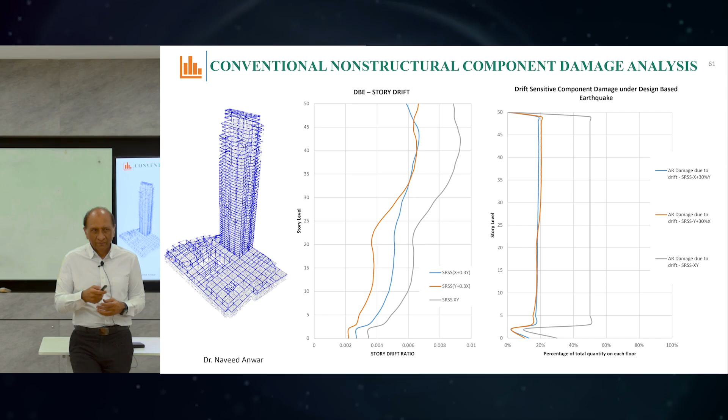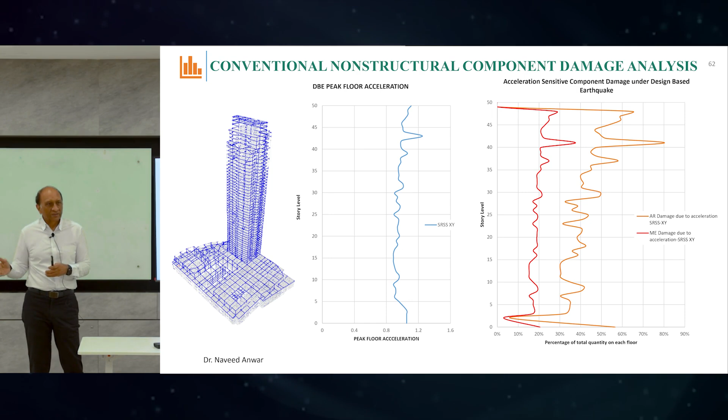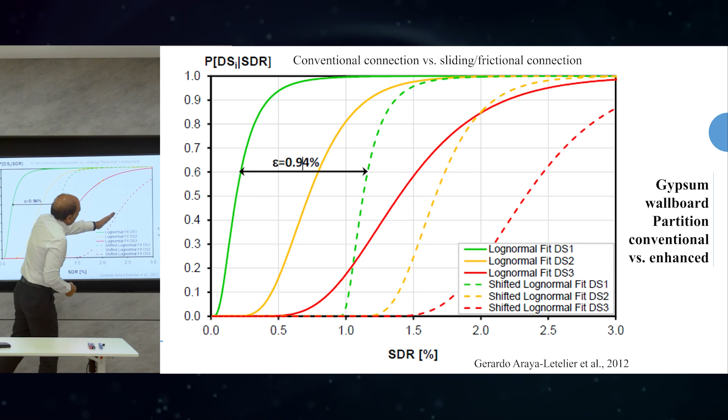So you can assess all of those things from this analysis. Going one more step, calculating drift, which we already have, acceleration, and velocity, and connecting it to the building components, you can go back and draw your own curve for that building. Then you can say, okay, this is where I want to be, I can bring it back. Let's say in the beginning you are here, you fix it, and you can bring it back, reducing the time of downtime and cost, right?

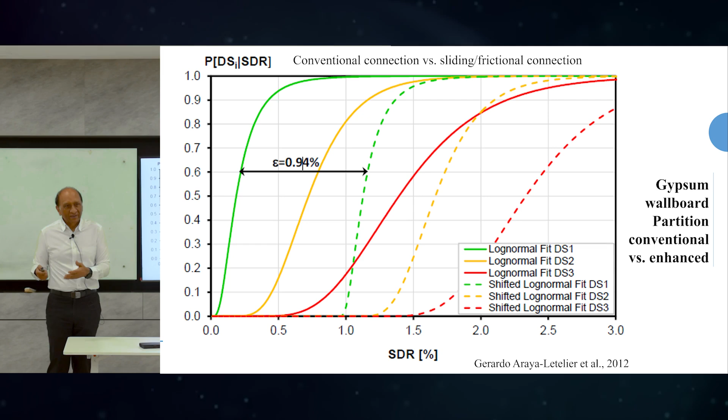Then you can tell the owner, if you spend more now, or change this to that, it might be better for you. The owner may or may not listen, because sometimes they don't care — they sell the building and they're gone, so they don't care what happens to the tenants. But some owners will care, because if they are data centers or hospitals or something like that, they would care.

So these are the components — mostly it's about the details, how you connect things to the structure. If you provide enough movement gaps and allow the structure to move while the non-structural components are kept isolated, you can save them. So mostly it's about improving the details.

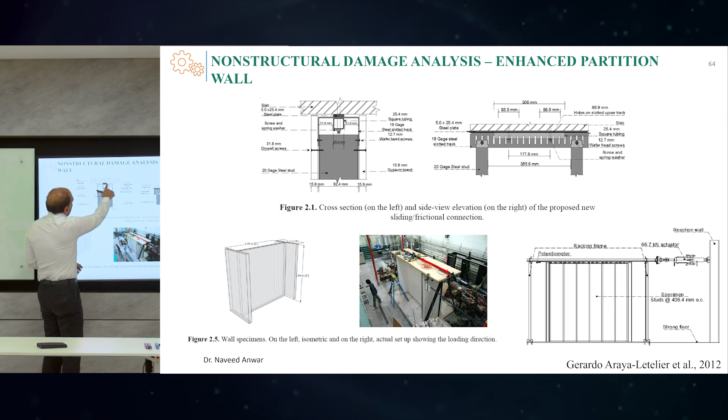Here, for example, the walls should not go and connect. The ceiling should have a kind of gap, a movement gap, and other things also. So everything is about details — how you connect the non-structural components to the structural components to prevent them from being damaged, not accelerating, not drifting, and so on. It's all about the details and making sure those details are followed.

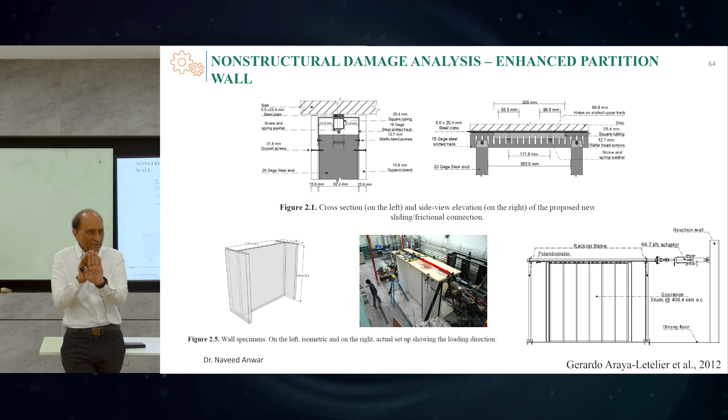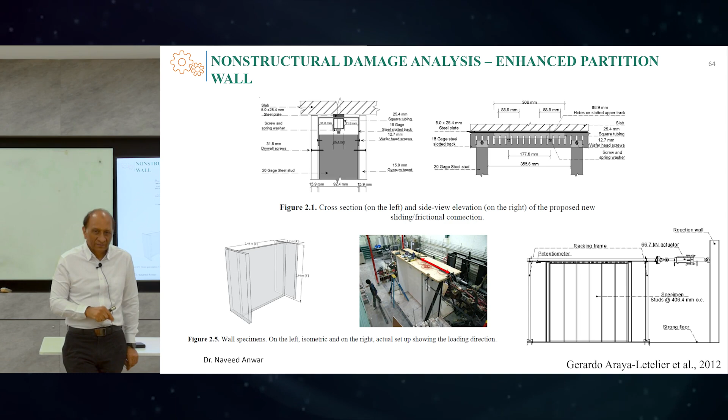Most of the buildings, the glass did not break because they have a gap. When they fix the glass, there's a rubber gasket around it which provides that small movement allowance. The facade panels did not fall down in most buildings, even though the building shook a lot, as much as a meter. Some buildings moved more than a meter, but because they are designed with a little bit of gap.

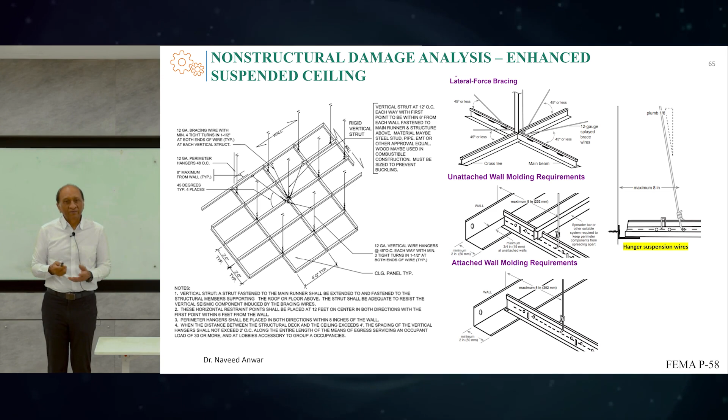So it's all about, like I said, detailing — how to improve the detailing, hang something, put the wires. It comes down to how you fix the non-structural things to the structure. And if those details are well done, then you can save the non-structural things from that — there you can move it.

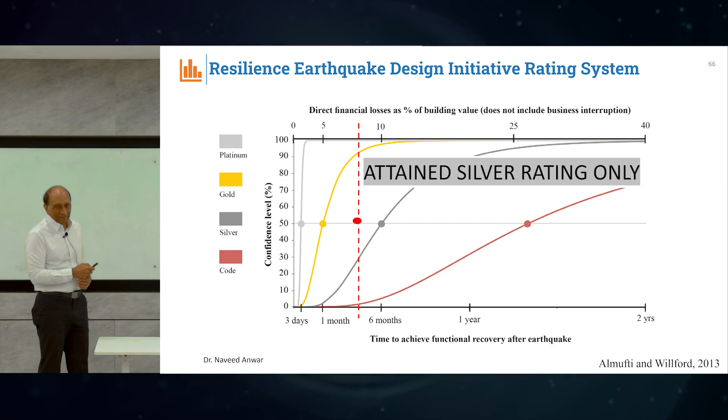So now, silver rating only — she was only able to get silver rating for her building. So that's the whole idea: save the people from all these hazards, ultimately.